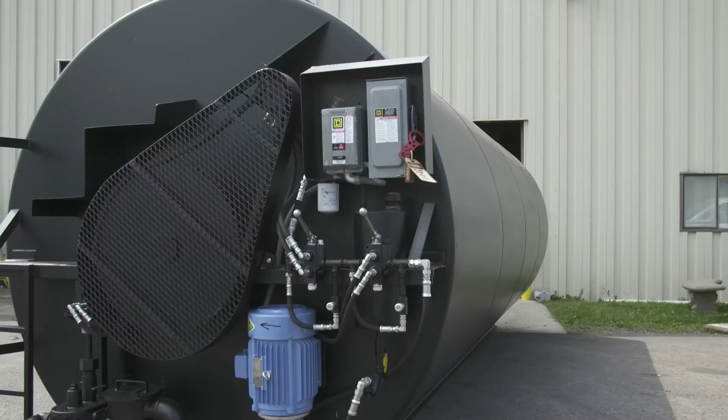This video will cover the procedures suggested by Neyra Industries for winterizing bulk storage tanks to prepare for the colder seasons and for the season startup.

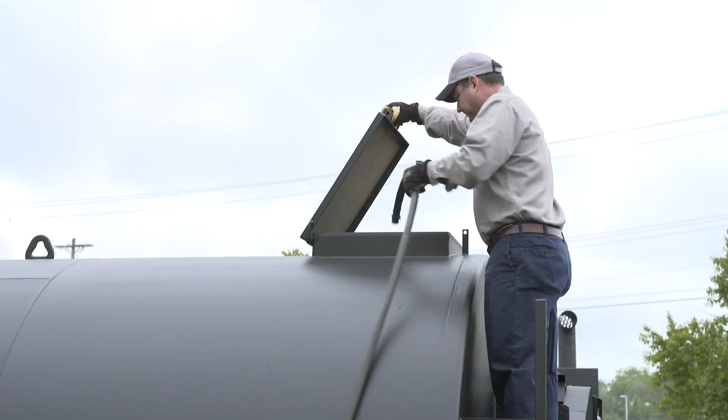With your last load of sealer, add dilution water to the bulk storage tank to help flush out any remaining sealer, as well as to clean the strainer and pump.

Lock out all power equipment prior to removing the manhead to ensure optimal safety conditions.

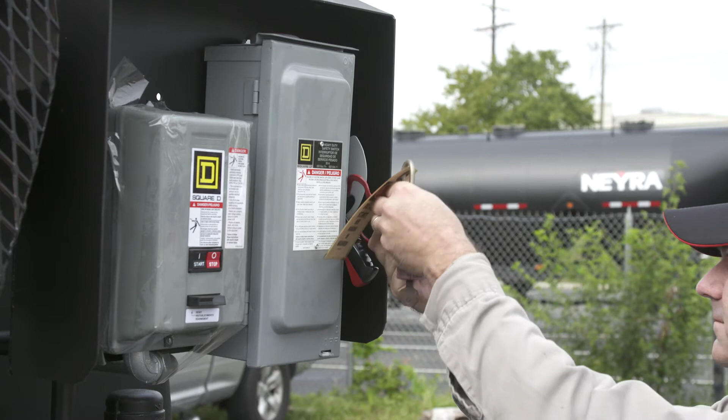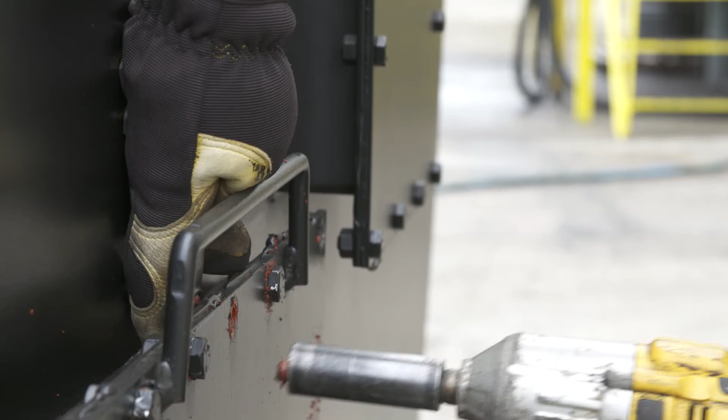Once the tank is pumped as empty as possible, remove the bolted manhead cover on the rear dish head of the tank. Remember to keep track of your manhead nuts and bolts during the off-season so you have them ready when you reinstall the manhead at the season startup.

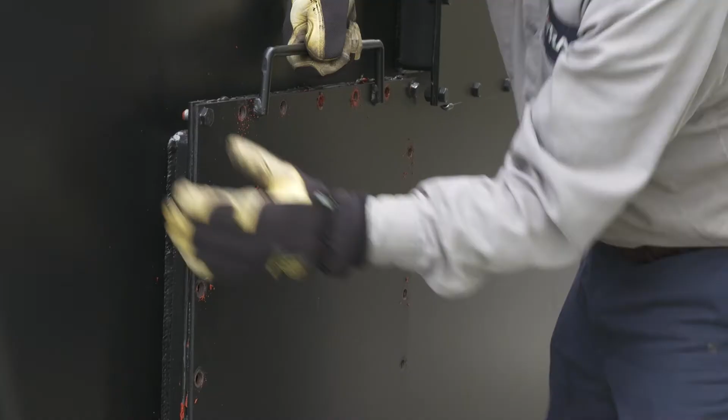With two loose-fitting bolts still in place, pry open the manhead to break the seal, and then remove.

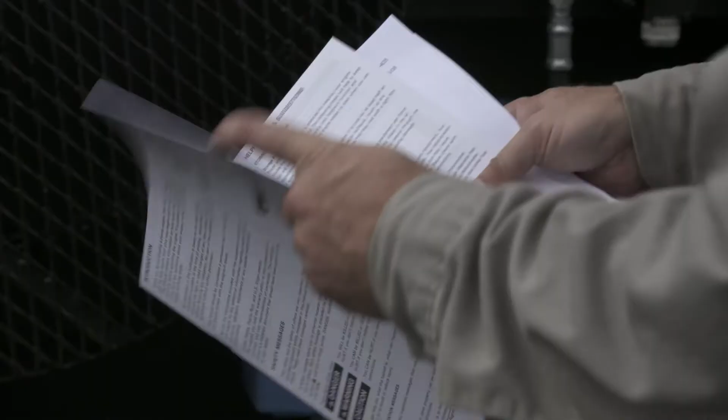For your gas engine, electric motor, or Roper pump, reference the manufacturer's manual for proper winterization procedures. If you cannot locate your equipment manuals, please reach out to your Neyra representative.

Next, remove the strainer basket from the strainer basket housing. Clean strainer basket prior to storing over the winter. Return strainer basket back to housing.

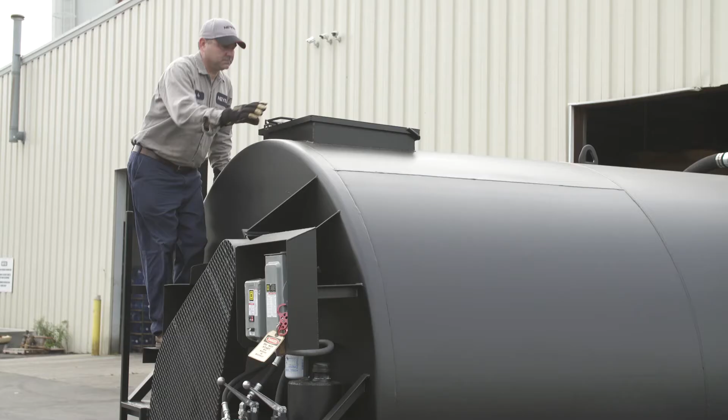Open the top hinged manhead to allow airflow to dry out remaining material in the tank. To restrict rain coming in the manhead, rest the manhead down while still allowing airflow. Leave top hinged manhead open until temperatures reach freezing.

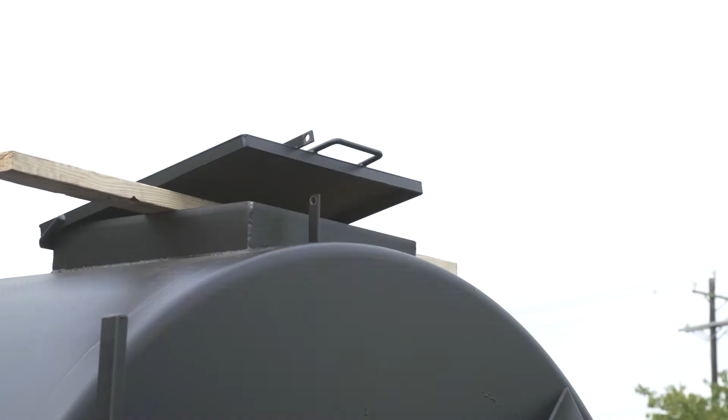During freezing temperatures, use proper lockout and tagout procedures and personal protective equipment to enter the confined space of the tank. Caution: make sure to have proper ventilation as well as the proper PPE prior to entering the tank.

Review all OSHA safety regulations regarding entering confined spaces and wearing the proper PPE. OSHA is the guide to successful tank entry permits.

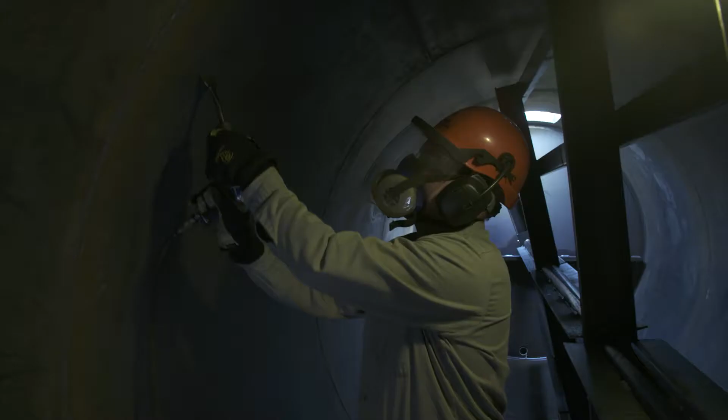Use an air chisel to remove dried sealer from all surfaces inside of the tank, including agitator blades, agitator shaft, and tank walls. Chip the tank during the coldest time of the day, beginning each day with the top of the tank, since the sealer will be brittle and chip off the easiest. When the sun is on the tank, chipping becomes much more difficult.

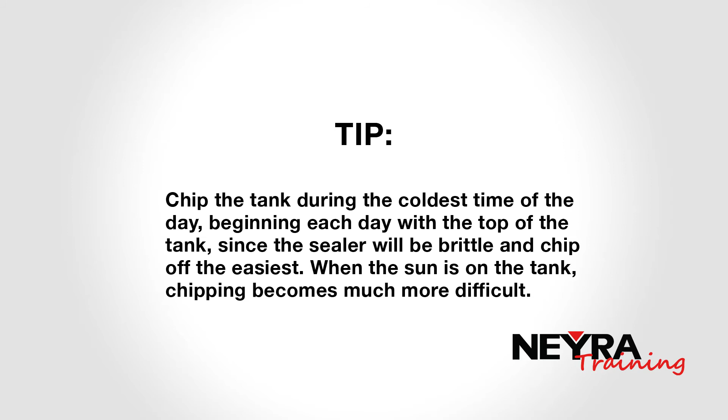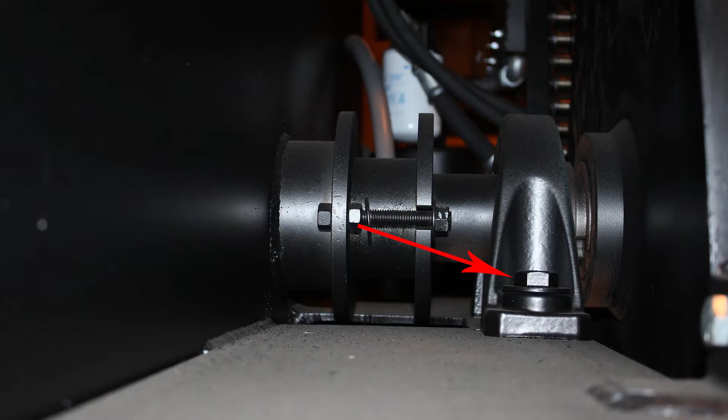Next, remove any sealer that is dried on the outside of the tank. Use the air chisel to remove dried sealer from any outside surface such as around the manhead, agitator, and packing gland. While working in this area, inspect the bearing for damage and replace if necessary.

Remove the 3-inch plug from the 3-inch T on the outlet of the tank to aid in the removal of the final debris from the tank.

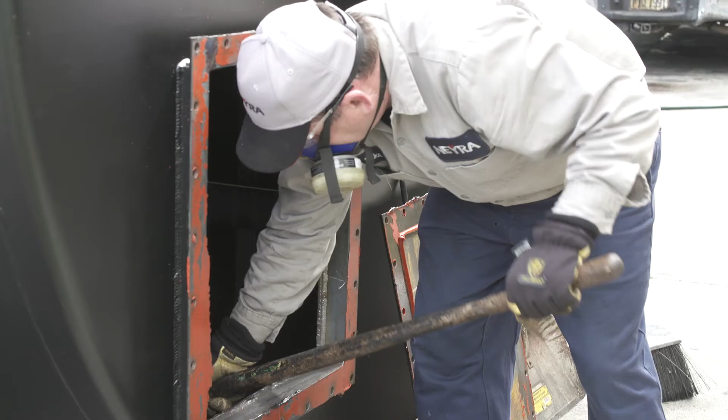When the tank is completely chipped out, shovel all the debris into a bucket to remove it from the tank. Sweep out any remaining dust and debris from the bottom of the tank. The tank is considered clean when all sealer is removed and only bare metal is visible.

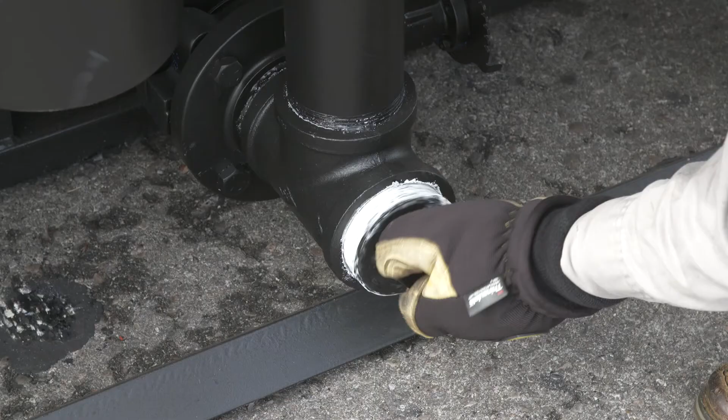Reinstall the 3-inch plug from the 3-inch T on the outlet of the tank when winterizing process is complete. Dispose of sealer chips in an approved disposal vessel. Remember to check with your local landfill about proper disposal regulations and permitting.

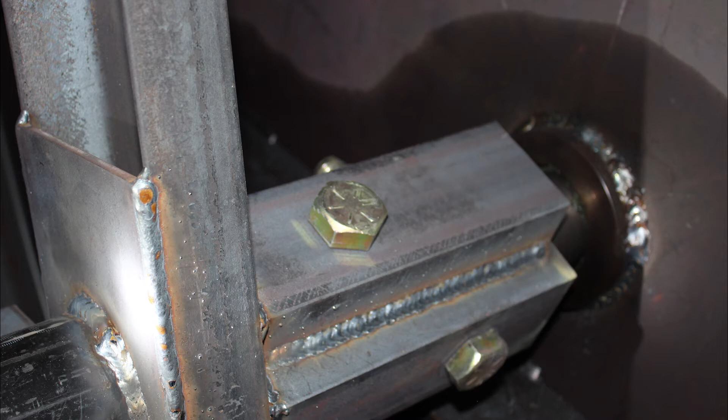After sweeping out the tank, do a thorough inspection of the agitator blade and shaft for any fatigue and cracks. If your agitator shaft is equipped with shear bolts, be sure that both are in good working order or replace if necessary. Inspect the agitator shaft receiver in the rear of the tank where the agitator shaft is connected to the rear dish head of the tank.

If worn, the agitator shaft receiver can be rotated 1/2 turn. If the agitator shaft receiver is worn out, contact your local Neyra representative. Repair any damages that may be present prior to season startup.

Warning: if the suggested winterization steps are not followed correctly, you could experience the following: agitator failure, pump failure, broken agitator shaft or blade, strainer basket clogging, or contaminated sealer.

Bulk storage tank season startup.

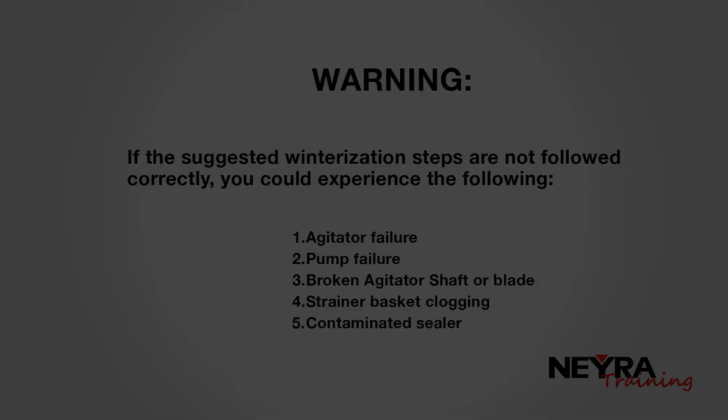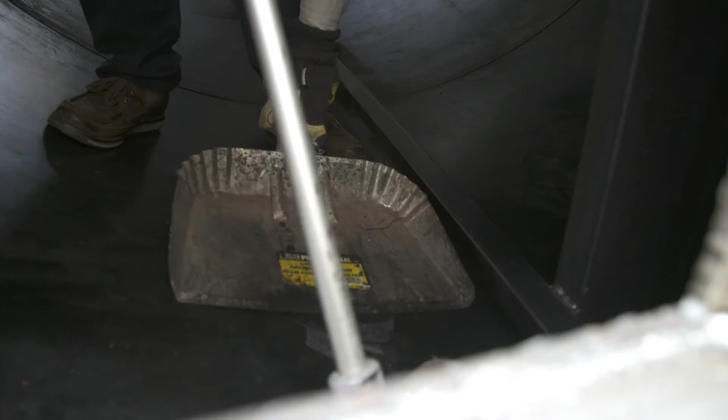To begin startup preparation, enter the tank to sweep out any leftover debris. Caution: make sure to have proper ventilation as well as proper PPE prior to entering the tank. Review all OSHA safety regulations regarding entering confined spaces and wearing the proper PPE.

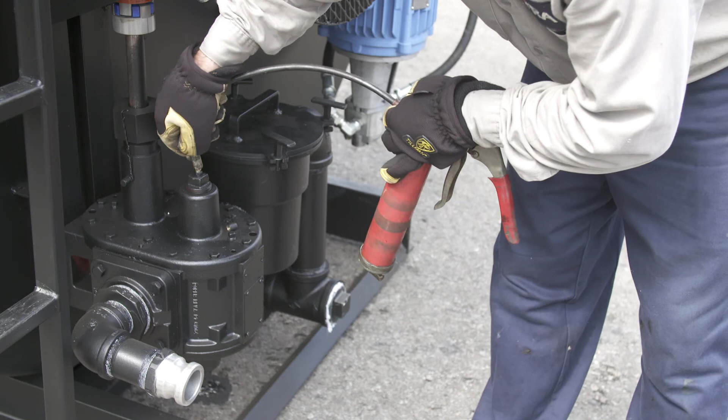Grease all fittings on the pump and agitator shaft. Reapply grease as needed throughout the season.

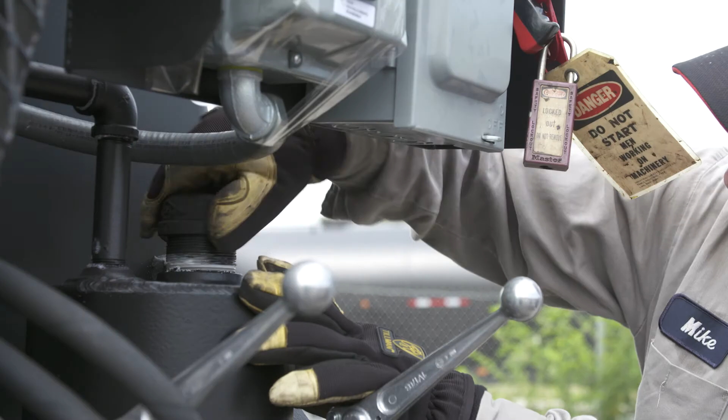Tighten the packing gland bolts using a 3/4 inch wrench. Check all fluid levels and replace filters.

Remove all lockout/tagout equipment from the tank.

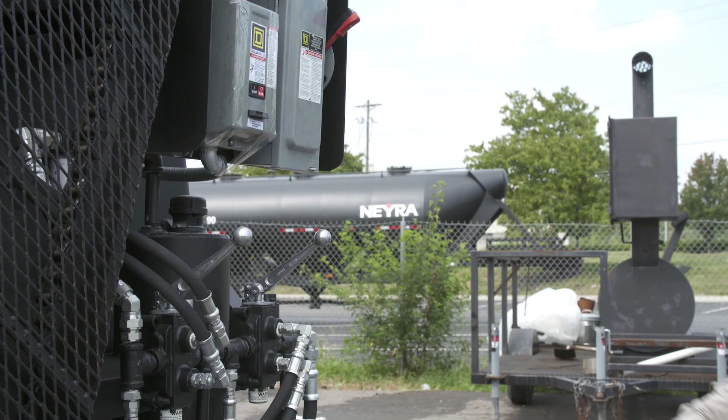Run the agitator system to verify that everything is in good working order. If everything is working properly, continue startup process. If the agitator does not seem to be performing properly, contact your Neyra representative for assistance.

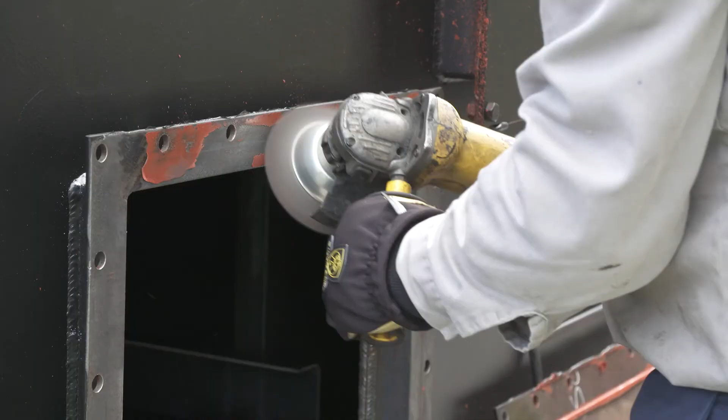Lock out all power equipment prior to reinstalling the bolted manhead cover to ensure optimal safety conditions. Clean the edging around the manhead plate and manhead opening with a wire wheel, then apply RTV sealant around the manhead plate.

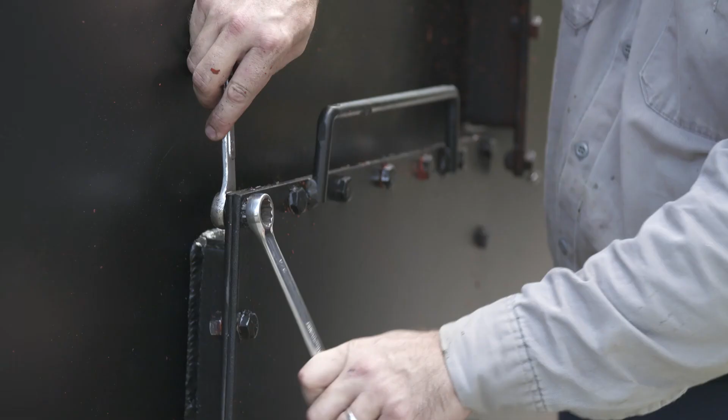Reinstall the bolted manhead cover to the rear dish head of the tank with two 3/4 inch wrenches.

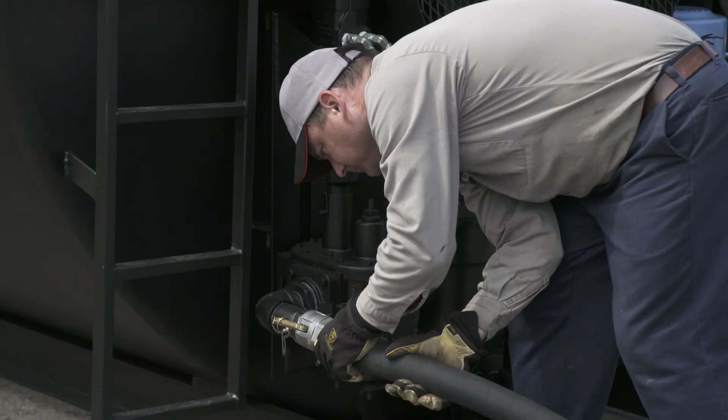Inspect all hoses and camlock fittings prior to receiving your first load.

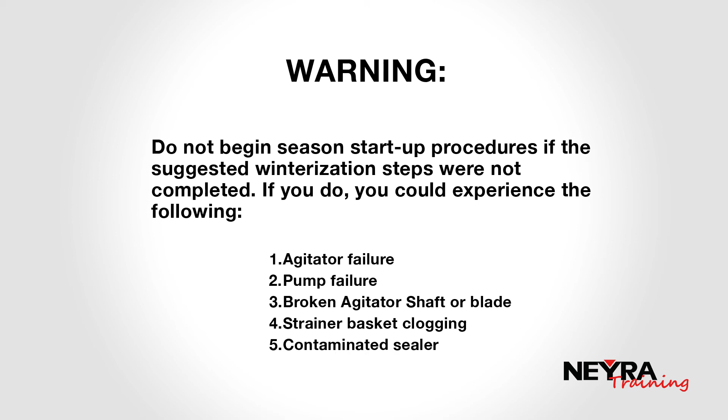Do not begin the season startup procedures if the suggested winterization steps were not completed. If you do, you could experience the following: agitator failure, pump failure, broken agitator shaft or blade, strainer basket clogging, or contaminated sealer. If you have any issues or questions about the condition of your tank, please contact your Neyra representative prior to ordering your first load of sealer for the season.